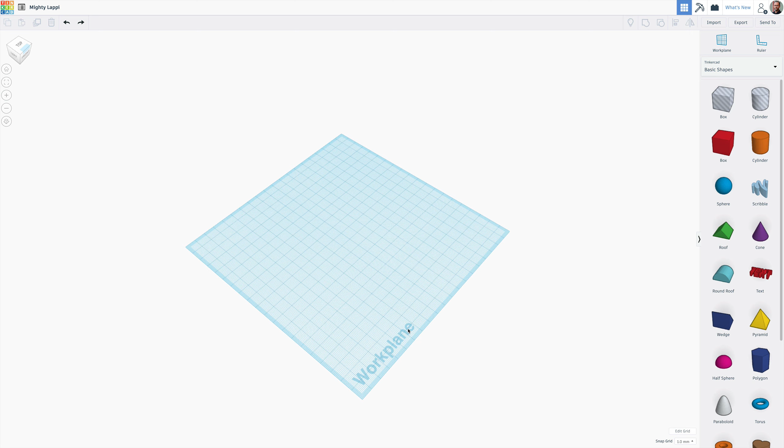Open a new project in Tinkercad, and then you are going to use this cube here to look at it in this exact view. Make sure it says work plane going this way, and you see it exactly as I'm viewing it.

Then we're going to add an egg. Go here and choose characters, and most of the way down you'll see an egg. We're going to click and drag it about to the center, but we can adjust the position later if it's not exactly right.

Don't click off, keep it selected right here. These view handles give you lots of tips. If you hover over these rounded arrows, they give you a protractor so that you can rotate this. Remember, the rotate tool was tricky for some of you to use, so this is the rotate direction we want. Remember, we're designing in 3D, so we have 1, 2, and 3 dimensions that we can rotate this in, and you want this one.

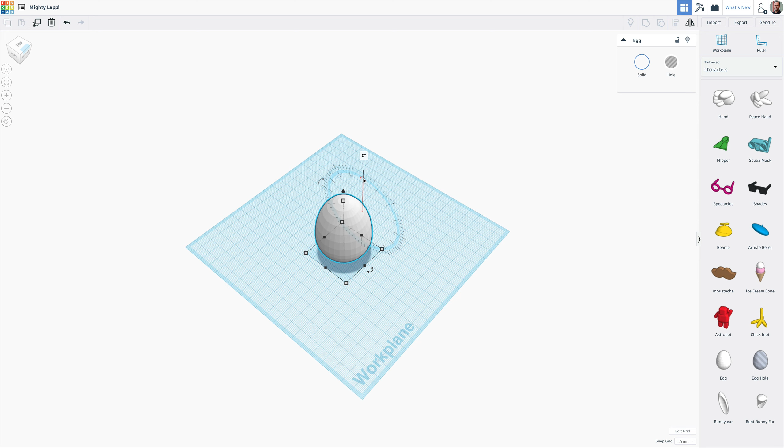I'm going to hold the Shift key down, and then click and move it down, and you'll notice it snaps in increments of 45 degrees. You want to make sure it says -90 degrees right here, and then you can release, and now your egg has tipped over on its side.

We're going to reset the view. Something I didn't notice many of you do was view your objects in those tutorials in all the different angles you can view them, because that's going to give you a lot of clues as to whether this will 3D print or not.

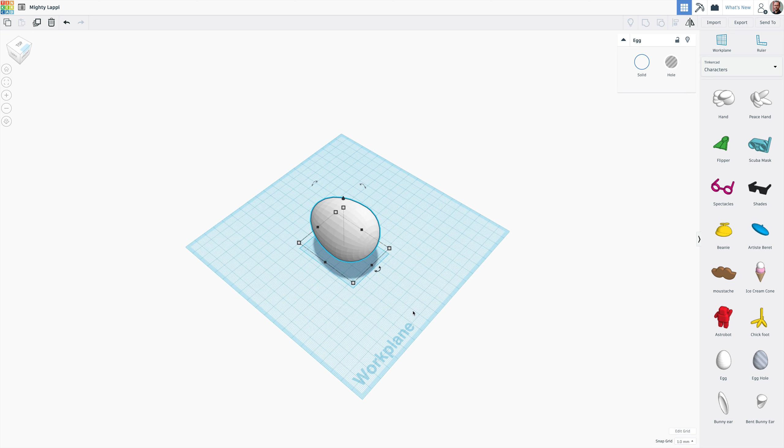So now I like the keyboard shortcut of holding the control key down and then clicking on my mouse, holding my mouse down as I move it into place. So now you want to look at it kind of head on, see where work plane is. You don't want it to be totally from the top, and you don't want it to be totally flat. You want to get a perspective view of it, so something a little bit like that is exactly what you want.

And then you can release. Don't click off again. I notice a lot of you doing fast clicking everywhere, and then you no longer are selecting the object you need selected, and then it's hard for you to get back to that point.

So the way we're going to do this is we're going to duplicate this egg once, and then we're going to move it to a new location. Tinkercad has something called Smart Duplicate. Once it's moved to the new location, every time we duplicate that new egg in the new location, it duplicates it with the same moves that we applied to it.

You'll see that after duplicating it 6 times after that, we'll have a pumpkin. But you got to follow these steps and follow them exactly.

So with the egg selected, we're going to duplicate it. On a Chromebook, you're going to hold down the Shift key, hold down the Control key, and then press the letter D. You might see a little flash, but it duplicates the egg right on top of the old one.

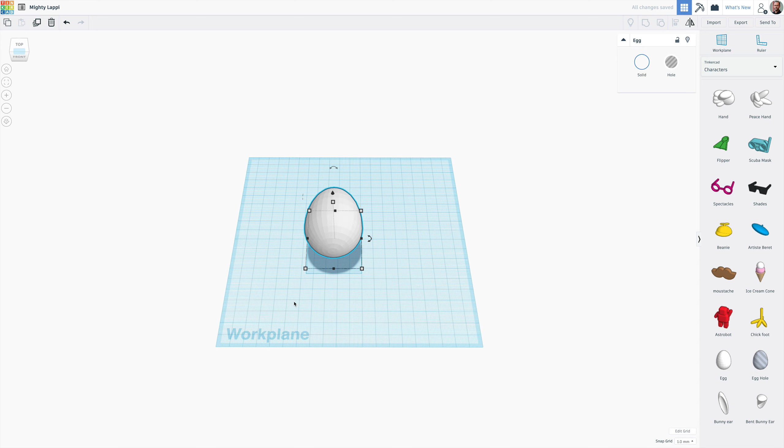So chances are you cannot see the egg that we're talking about. We need to rotate this duplicated one, but you can see that I only see 2, this one and this one, of the 3 rotational axes that I need.

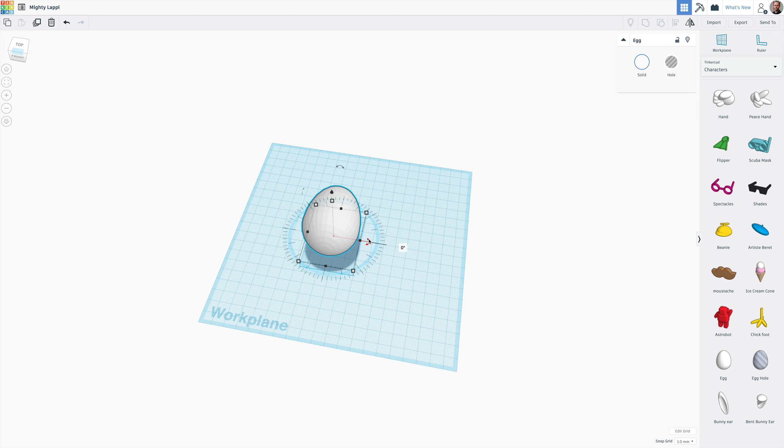So if I hold the Control key down and then I rotate just a little bit, I'll see the 3rd one that I need. And if I hold Shift down and then I click on it, it snaps in 45-degree increments, and then I can let go. And now you can see that there are 2 eggs.

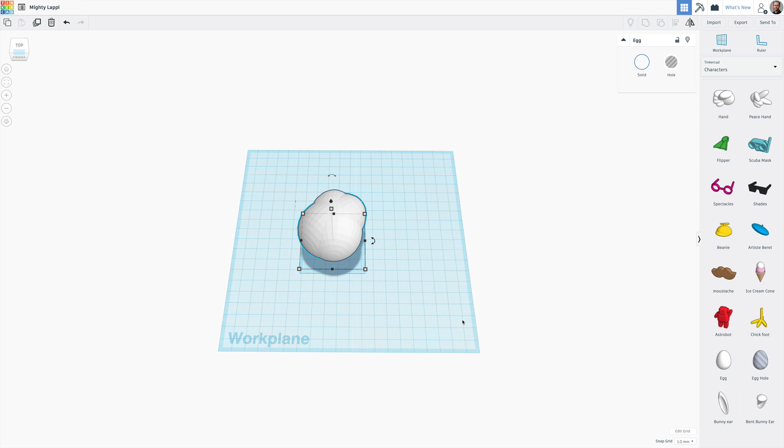All right, I'm going to move it back into the right view because that's what I need it to do. You can see as long as I don't click off the egg, it stays selected. Notice in the bottom right hand corner it says Snap Grid and 1 millimeter increments. If I zoom in, you'll notice that these squares right here are all 1 millimeter increments.

So I want to move this to the left, the new duplicated one, 10 millimeters, and I want to use the up arrow to move it forward 5 millimeters. That's going to give me the offset that I need. So I'll move it now 1, 2, 3, 4, 5, 6, 7, 8, 9, 10 to the left, and then I'll move it up 5: 1, 2, 3, 4, 5.

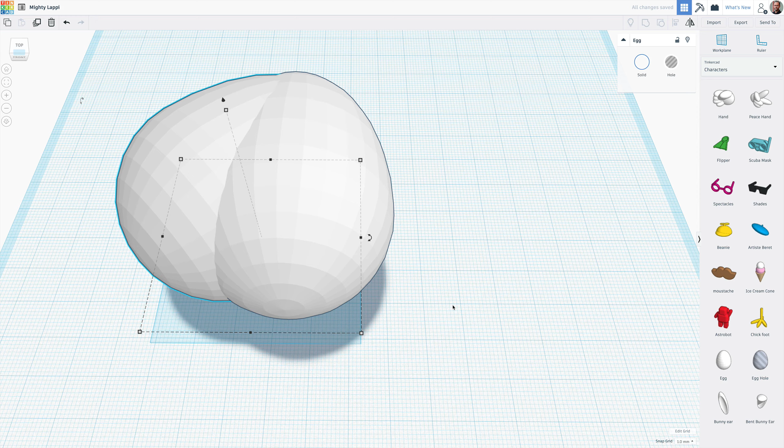And I'm going to zoom back out so you can see what that looks like. Notice I did not click off, so it's still selected, and I've got this blue line going around. It's that new egg that I've selected.

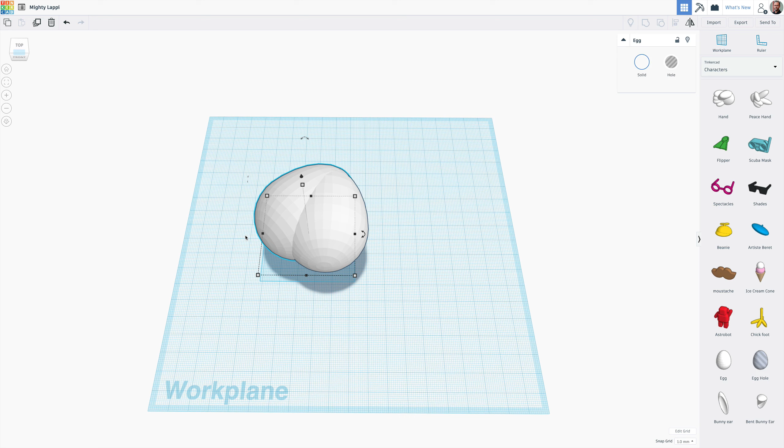That's super, super important, because now if I just hold the Shift key down and then I press duplicate, it'll keep adding: 2, 3, 4, 5, and 6. It'll keep adding eggs in that slightly offset pattern, and now you can see that I've got the beginnings of a pumpkin. So you got to get one egg down, duplicate it, rotate it and move it a little bit, and then duplicate it 6 more times in order to make this pumpkin shape.

So now we're getting close to everything. You're going to press Control A, which is going to select everything.

And then you'll see it almost looks like it groups them. You can click here on Group, or you'll notice there's a keyboard shortcut of Control G.

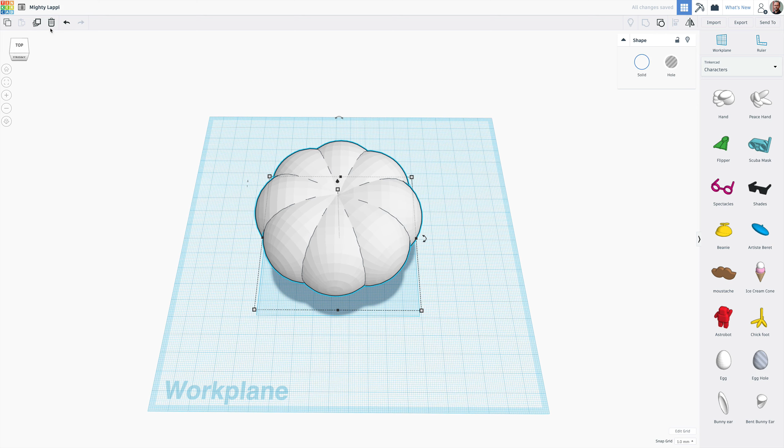Just for fun, if I click off and then click on, now if I move it around, all the eggs move together. If you don't group it and try to move it, each egg will move one at a time. If that happens, don't forget to use the undo button or the keyboard shortcut of Control Z to move everything back into place.

So we're going to adjust our view plane a little bit. I'm going to press Control A to select everything. If you accidentally click off and nothing's selected, just press Control A to select everything. I'm going to show you that my pumpkin is hovering above the surface, and this is really important when we start 3D printing, because this would fail as a 3D print.

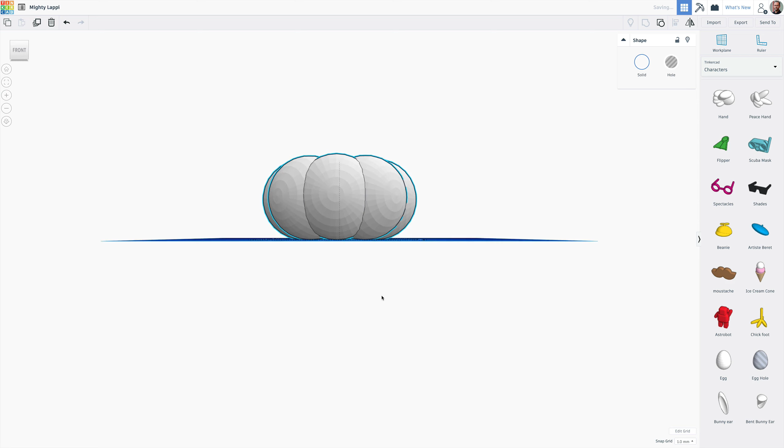So with everything selected, the keyboard shortcut of D will drop it to the surface. Watch what happens - I press D and then it falls to the surface, and now it's making contact. Okay, now we're ready to move to the next step.

So now that you've grouped it, you can resize it. You can make it narrower, you can make it wider, you can do all kinds of things. If you don't like it, just do the keyboard shortcut of Control Z to go back. Also, if you hold the Shift key down and then resize it, it resizes in proportion, keeping the same width, height, and length dimensions, but moves them all together.

So find the shape the way you like it, okay? And then we are going to add the stem in the center. For this, we'll go back to the basic shapes, and there's this paraboloid shape right here.

So we're going to drag it out onto the workspace right here, and then hold down the Shift key so we can go in increments of 45, which makes it much easier. Then we're going to grab this top one because we want to turn it upside down to make its stem. And then we release, and now we have it upside down.

Okay, I'm not going to resize it now because I want to put it on top of the pumpkin. So a lot of you notice that if you just move it sideways, it doesn't go up. But if you take your mouse and try to go up, it actually just moves it forward, but it doesn't move it up in vertical space.

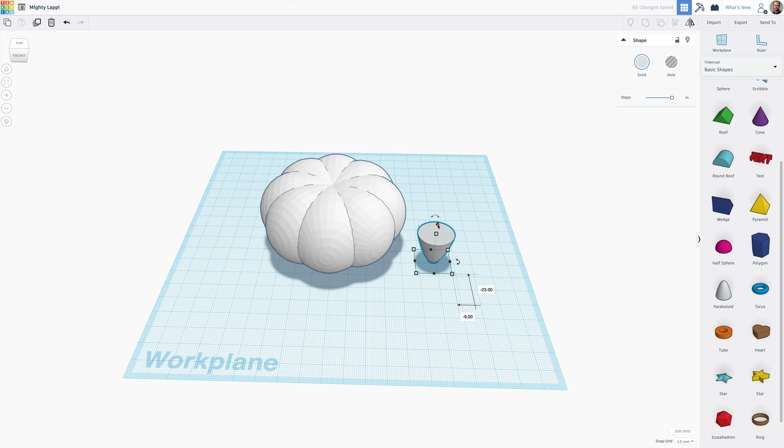So you want to make sure you grab this cone here. This cone says, oh, we can lift it up, and it makes more sense if I show you from this view. So if I grab the cone, I can move it up or down, and you'll see I get that measurement here. And then I release, and then I can move it over kind of where I want it in the pumpkin.

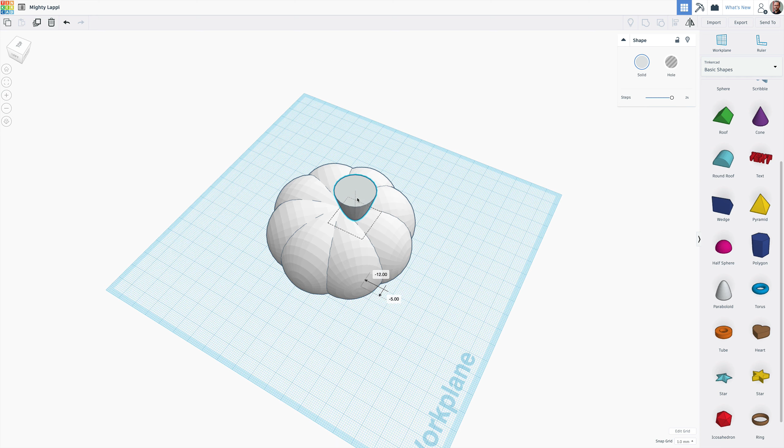And you have to keep changing your view because you won't notice that this is not sort of towards the center. We'll use the align tool to get it really towards the center, but we just have to get it kind of close here.

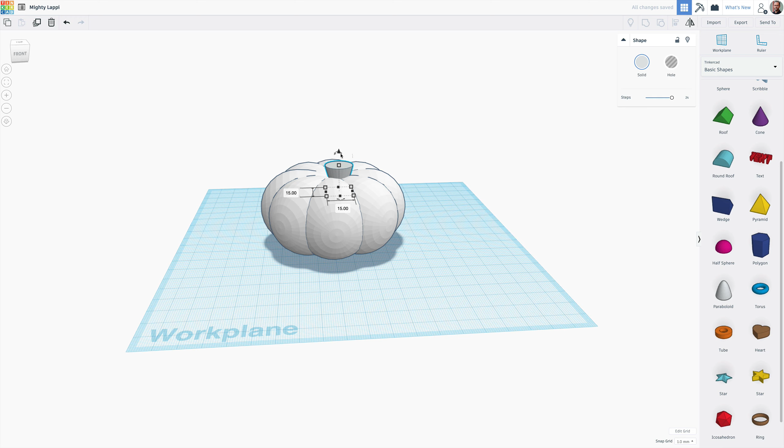That's okay, and I'll probably want to bury it down into the pumpkin a little bit. I'm going to hold Shift and then resize it a little bit because it's not exactly the size that I want. And then I'll move it around, and that kind of looks like the pumpkin that we're talking about.

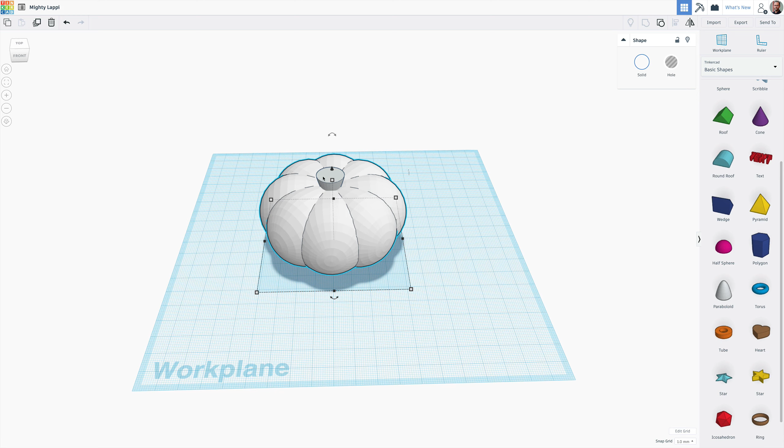Now we're going to use the align tool, and I know the align tool was tricky for you as well. So you're going to click on the pumpkin, and that selects the pumpkin - we haven't grouped it with the stem because that would force us to have the same color, and we don't want that. So we're going to keep it ungrouped, but now you're going to hold the Shift key and click on the stem too, and that means everything is selected. Then you'll click here on the align tool.

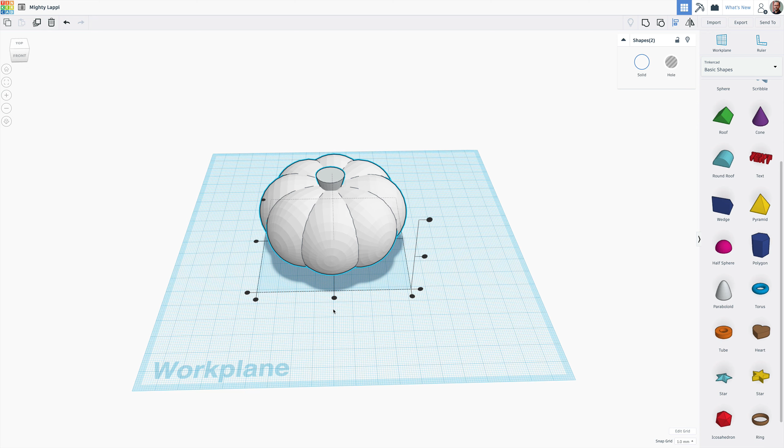Now, you might notice that there are two lines that cross under the center of the pumpkin. There's this one, and then there's this one. So that's how the align tool works. If we do the two crossed ones here, it'll put it in the center.

So watch what happens when I click on it - it moves it a little bit, and then I click on this one, it'll move it a little bit more. And now if I hover over the top, it's aligned perfectly with the center of this pumpkin. And there we go. So now we're ready to add a little bit of color.

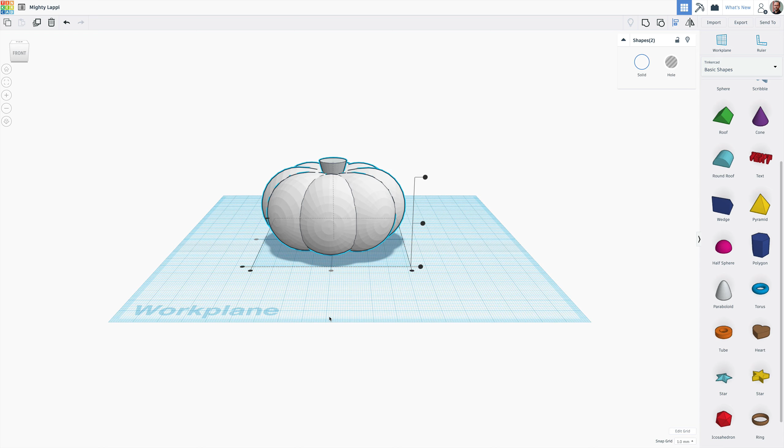It's pretty easy. I'm going to click off, then click on the pumpkin part, and click here on solid and just choose an orange color. And then you can click on the stem, click here on solid, and choose some kind of a brown color. And now you have a pumpkin.

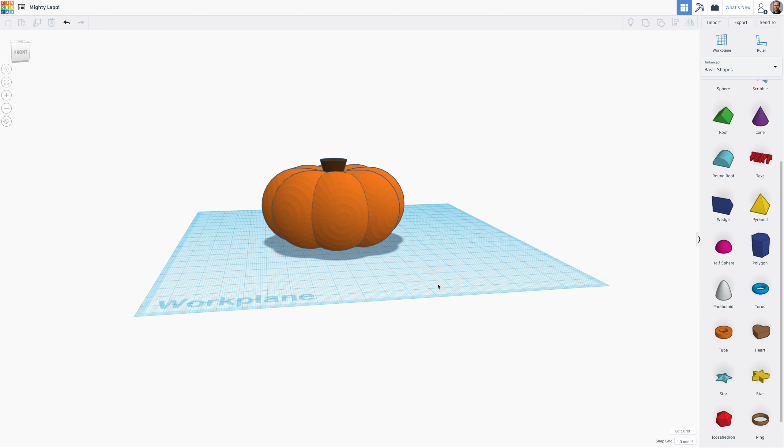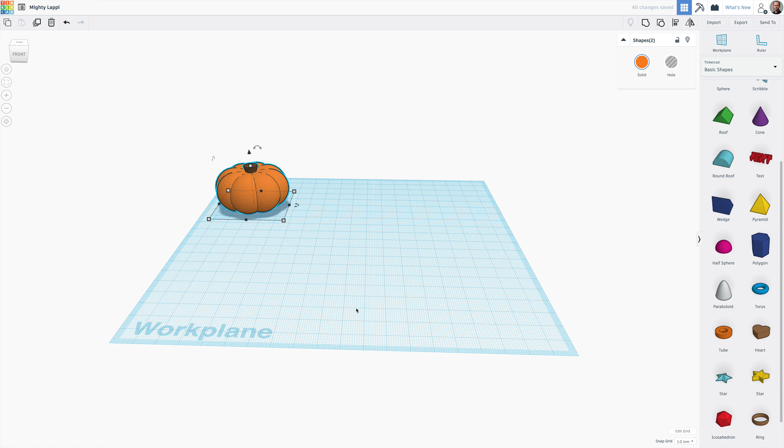And instead of saying, oh, I'm done, can I 3D print something? Make 10 more pumpkins - that's how you learn how to use this tool. You can select everything and resize this one if you want. Don't forget to hold the shift key down to keep your proportions. Then you can move it off to the side, and on the same thing, go back and make another pumpkin. Make a bunch of pumpkins.